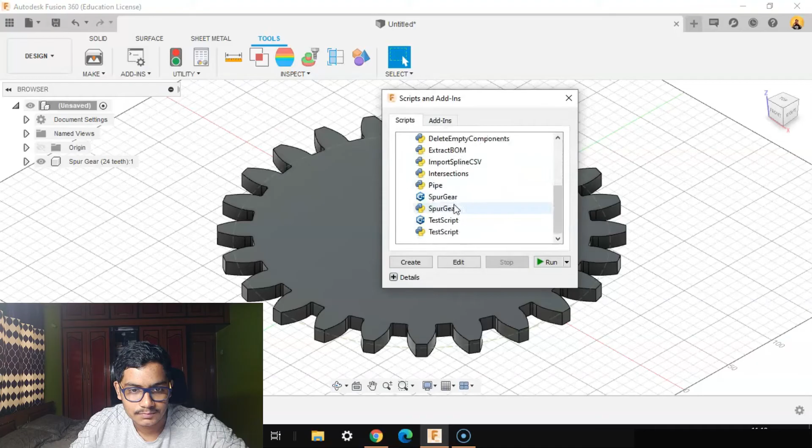We won't totally design the gear. We'll go to Tools, Add-ins, Scripts and Add-ins. Here you can see you'll get spur gear already. We'll double click on it and we'll say OK. We'll add one more, but let's increase the hole diameter for the second one.

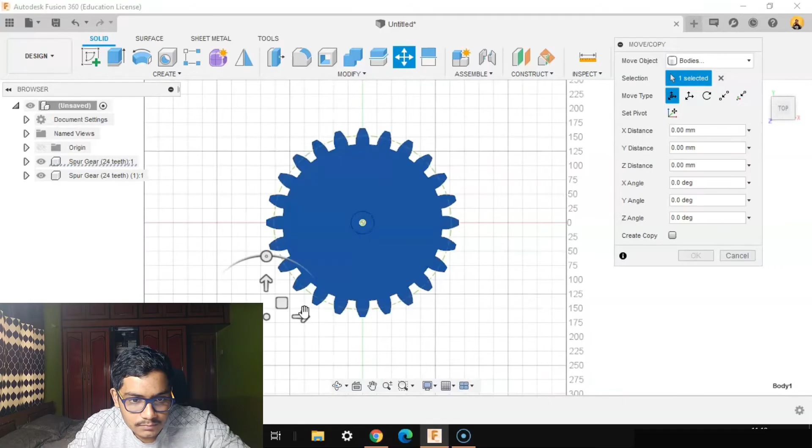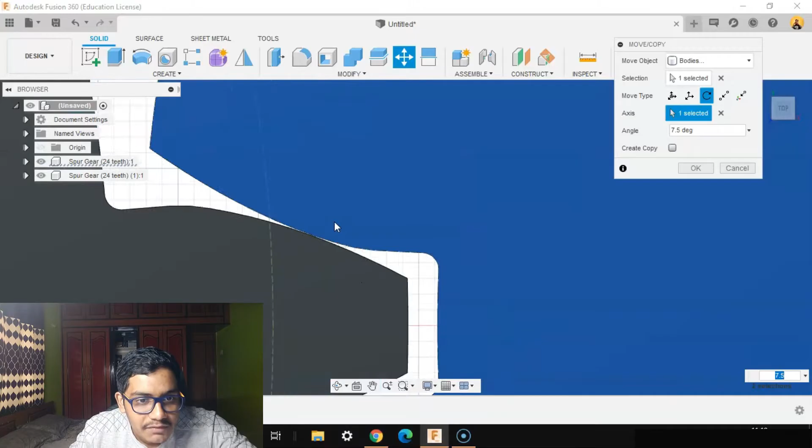Let's go to the top view. Let's move them. Let's rotate it with respect to this axis. Make sure that they are not touching each other. There should be at least a little gap between both of them. Nice. Say OK.

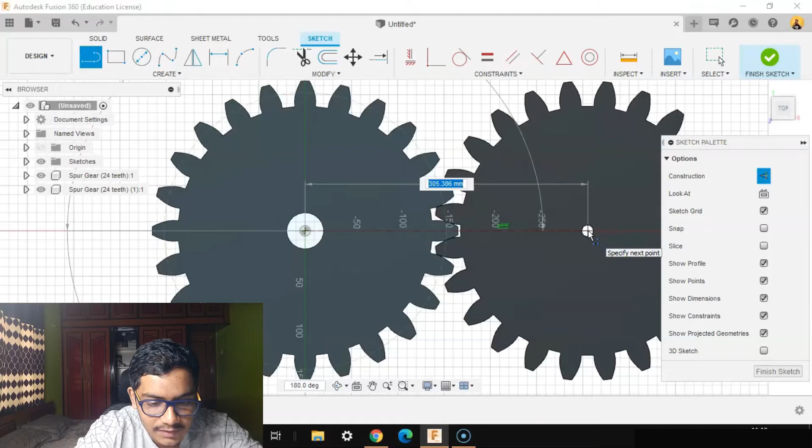Let's create a sketch on this gear. I'll make a construction line from this point to this center. This should be 305. Even the distance between the gears that time was 305. We'll say finish sketch.

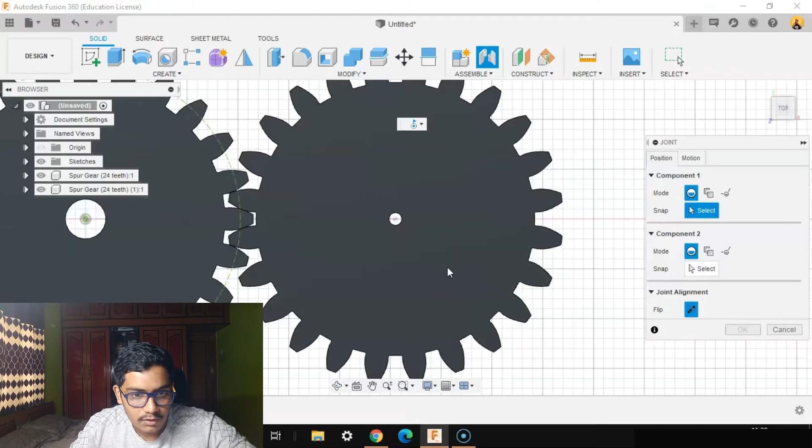Let's make the joints now. Motion will be revolute. Revolute joint. You have rigid, you have revolute, you have slider, cylindrical, pin slot, planar and ball. We'll go with revolute and position. For the first gear, make sure that this thing, second one, you can see the animation, it's revolving around that axis. I'll say OK. I'll go to joints.

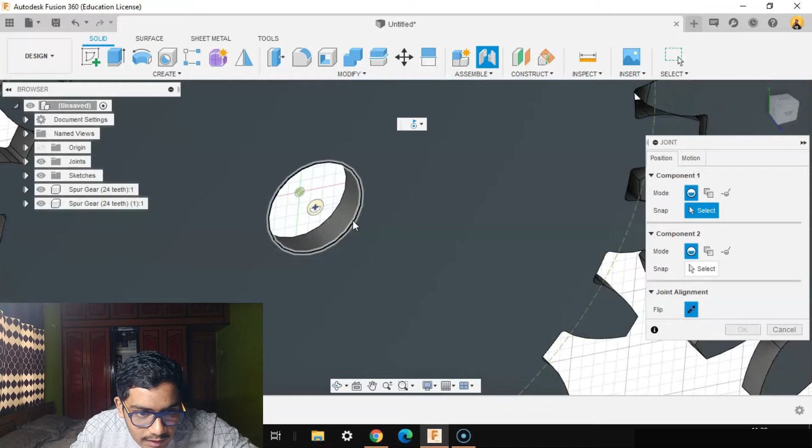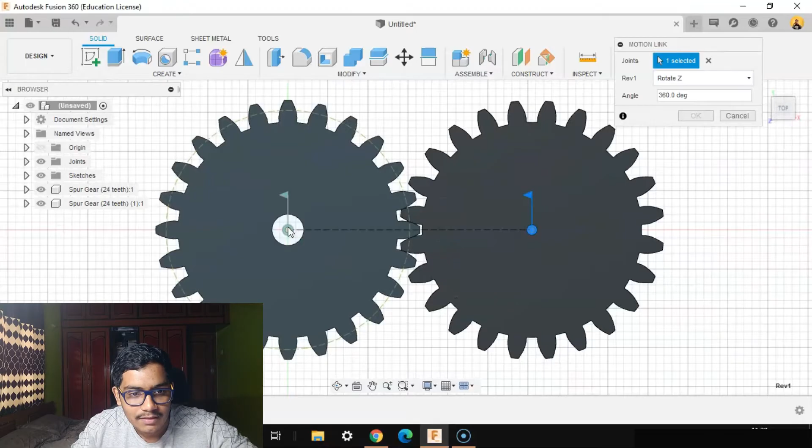Now for this one, select this one. It's revolving, I'll say OK. Go to the top view again. You can see that this is revolving, revert position. So now let's add the motion links. I'll add the motion link between these two joints, this joint as well as this joint, but the reverse, because gears will be reversed. I'll say OK. You can see that when I move this, it's perfect now. Again I'll revert back.

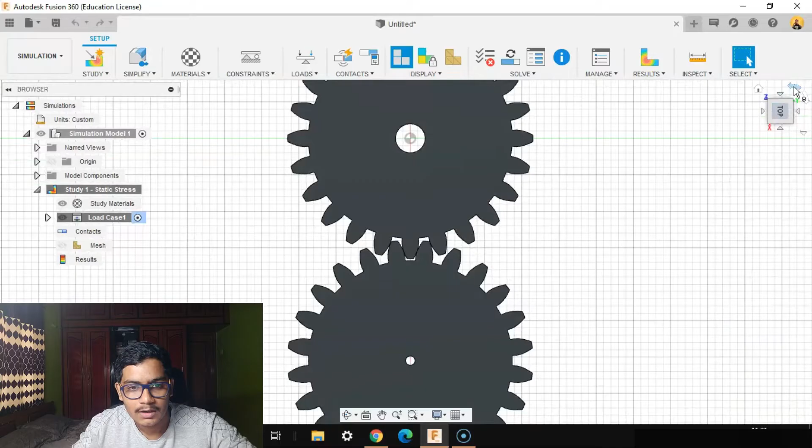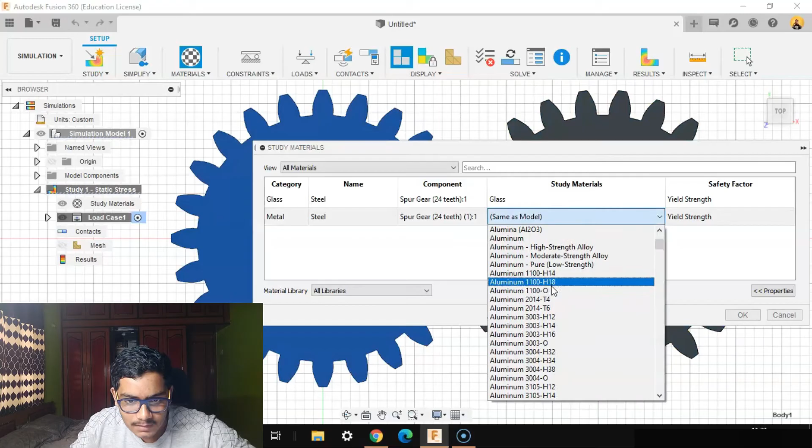So now let's simulate. Go to simulation. We'll be fully focusing on static stress simulation in this video. Go to my top view. Okay, let this be the driver, let this be the driven gear. So let's go to materials, study materials. This gear, let's make it as glass. We're just understanding simulation here, and this one as stainless steel. You can see that this is glass, this is stainless steel. Glass is not visible, so I'll inspect and toggle it on, so you can see in different colors. We've done with our materials.

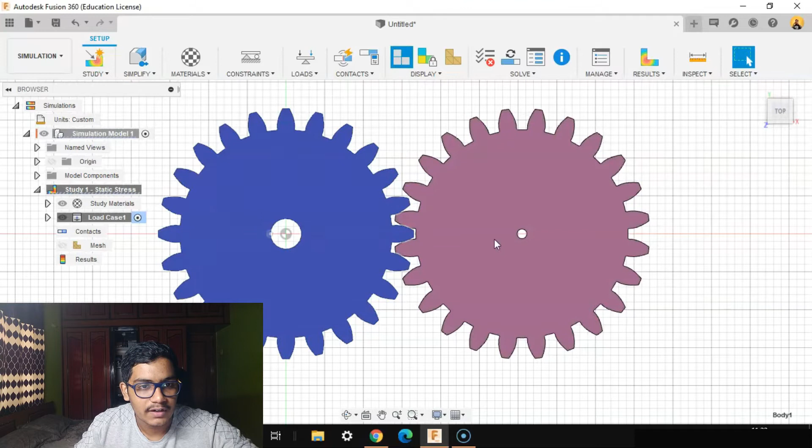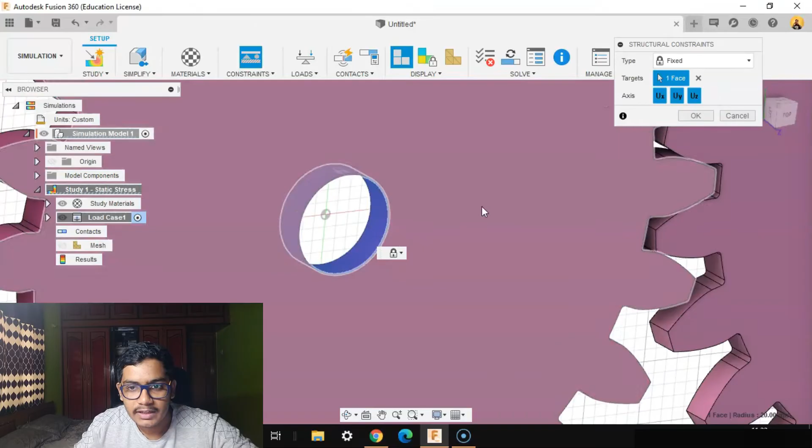We'll go with constraints. We'll fix this face of the gear. We'll say OK. We'll again constrain this face, but this will be a pin so that it can revolve. Axial and radial will be on, tangential will be off.

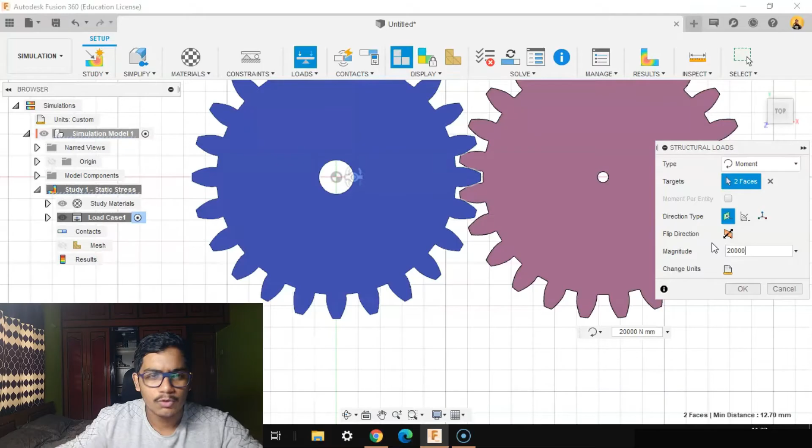OK. Now let's give the load. Type will be moment on this face as well as this face. Or you can even give it only one face, but I'm giving it to two here. I'll give around 20,000 Newton millimeters. That is the units here. Not too much of force. It will be 20 Newton meters.

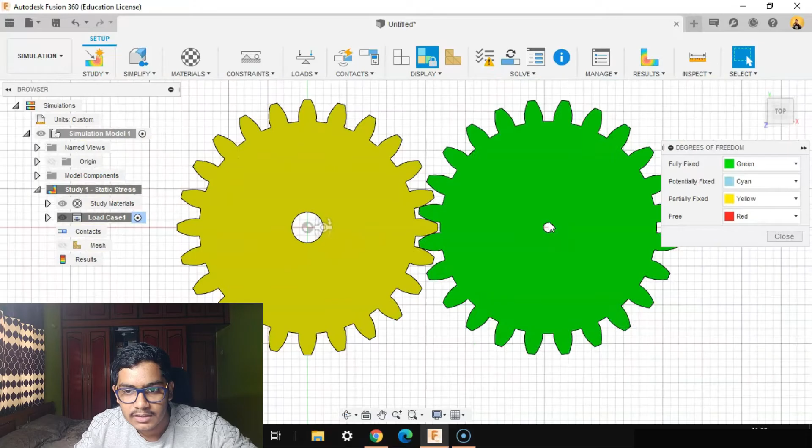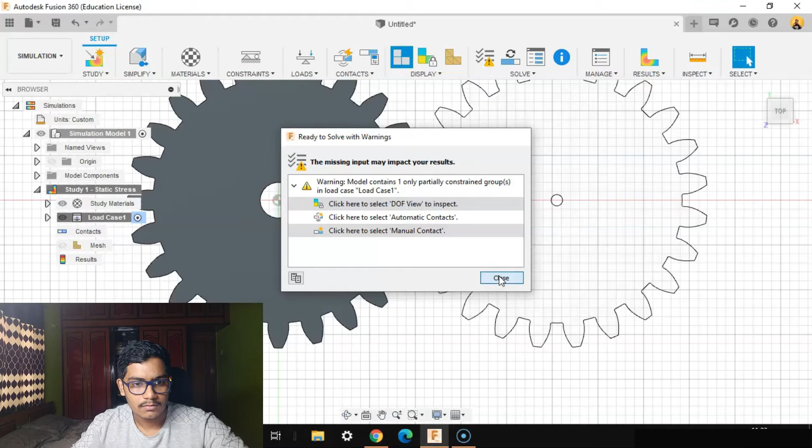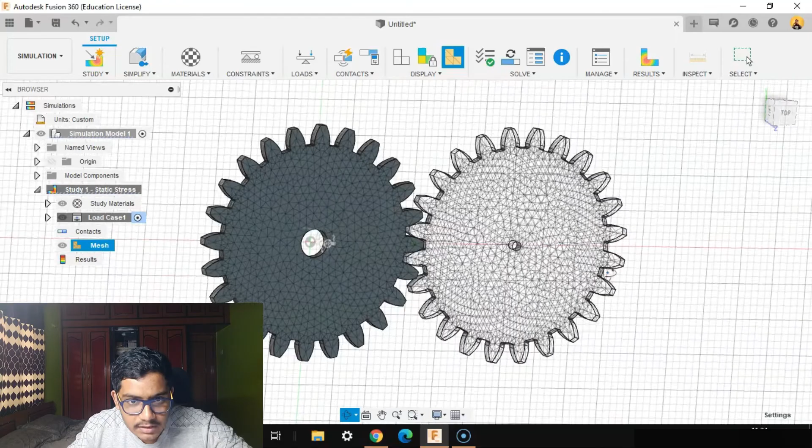You can see that our pre-check is telling it's not yet. We can't still solve it. Degree of freedom view. This is fully fixed, this is partially fixed. We need to fully fix it. So we'll do automatic contacts, generate. Automatic contacts is done. Compute the mesh. Okay, the mesh is done. So you can see our pre-check is already ticked, so that we can solve it now.

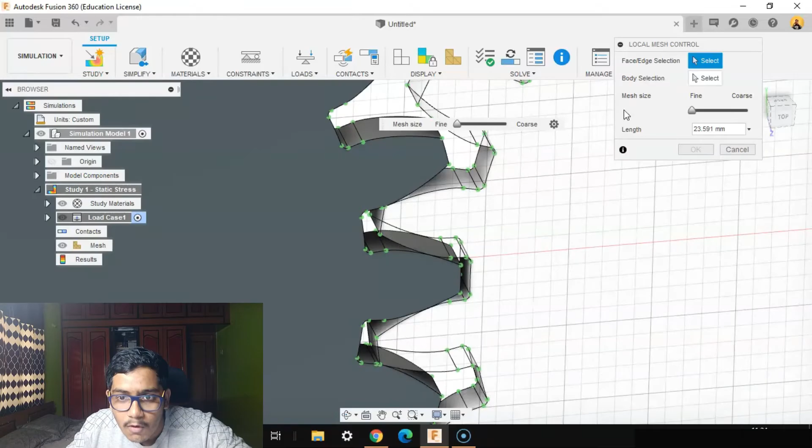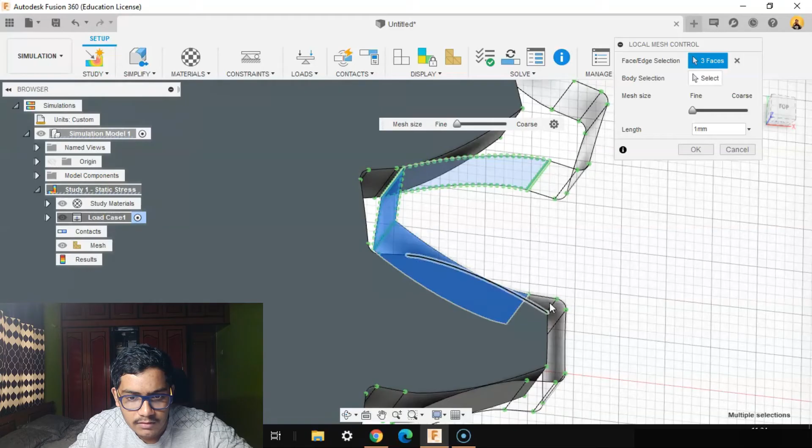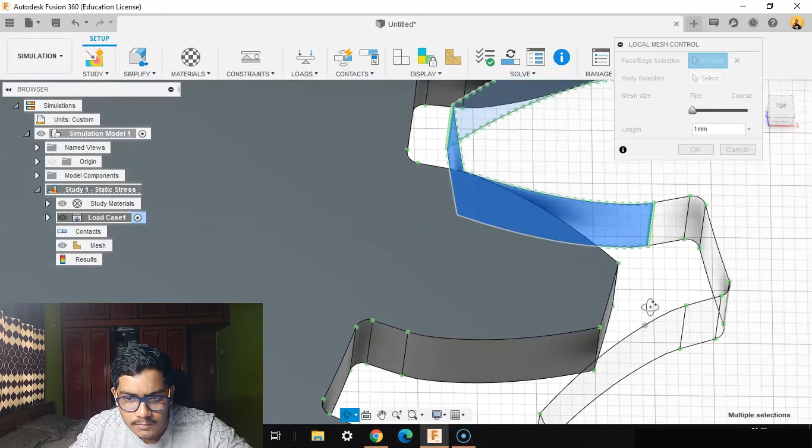So I'll go to manage, I'll go to local mesh control. You can see that this side is where the maximum tension force will be applied, over these faces here. So I'll select these faces and make them around 1 mm, so that after solving we can see exactly. This face, this face, this face, this face, this face, this face, this face. I'll say OK.

So now our pre-check is also done. The study setup has all the information required. Now we'll solve it. I'll solve it on the cloud. We didn't name the file. We'll save it first. We'll put it as Gear Study of Simulation. Save. And our solution is done. You can see the actual minimum safety factor is 3.4. I wanted a safety factor of 4.

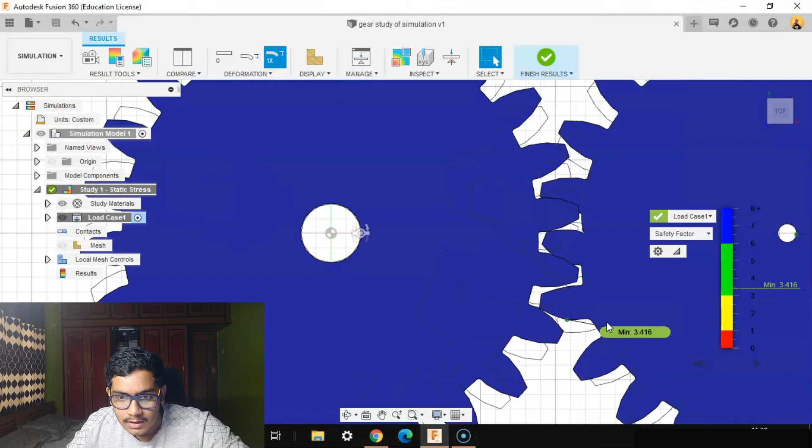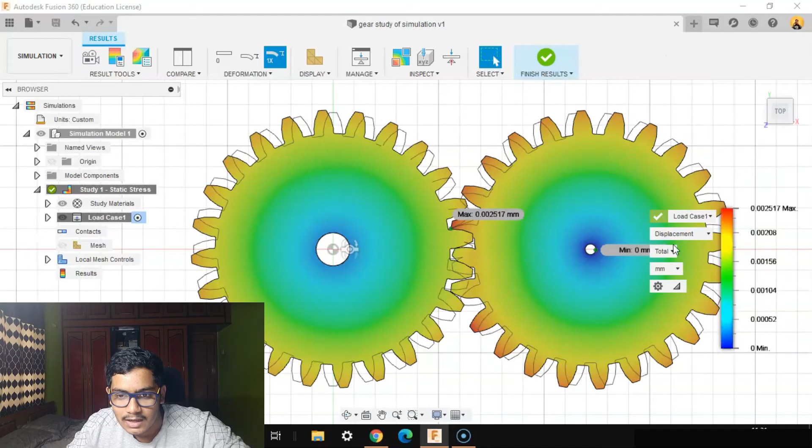Never mind. You can see here you have safety factor, you have stress, you have displacement, you have reaction force, strain, contact pressure. Let's animate and see. Go to safety factor, zoom in and see. You will get to know the areas where you will have the least factor of safety. So this is load case 1.

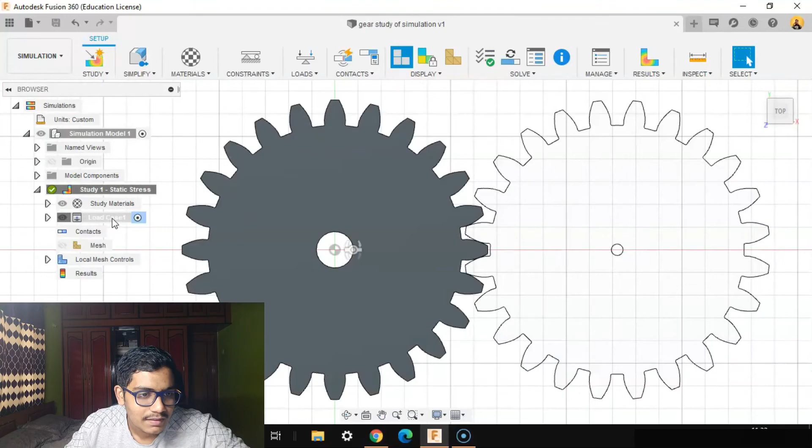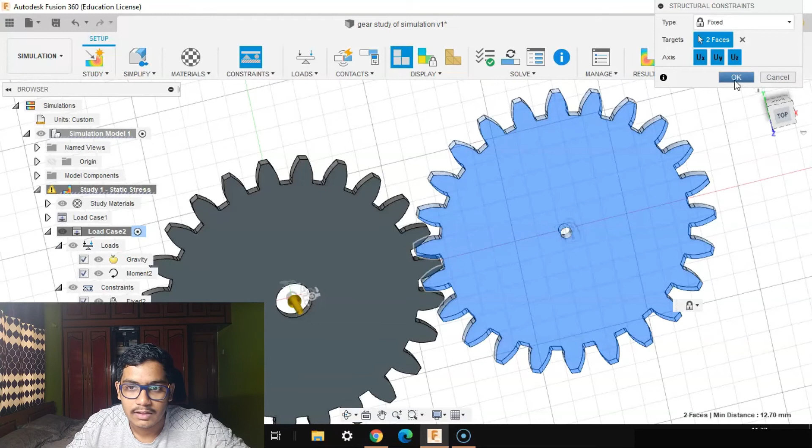We'll say finish results. We'll make another load case. We'll clone this load case. This will be load case 2. We'll go there. All the loads are there. We'll turn on gravity here. We'll see how that works out. Constraints, we'll add 2 more constraints. Let's constrain this face as well as this face. And I'll say okay. Now let's see how the solution will come out. I'll solve it on cloud. You can solve it locally or on cloud.

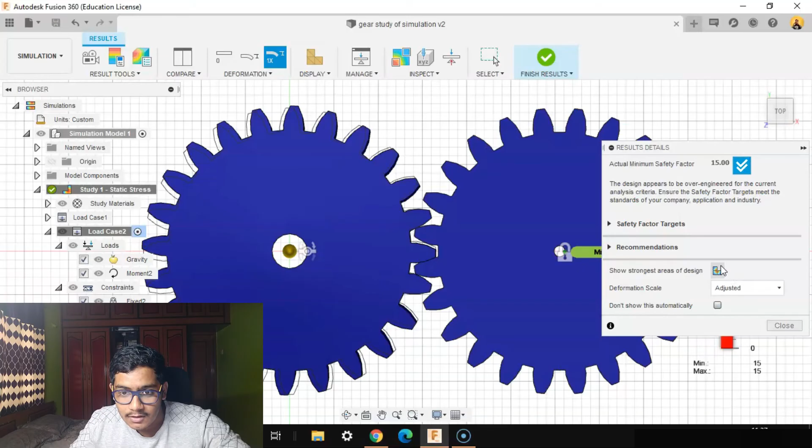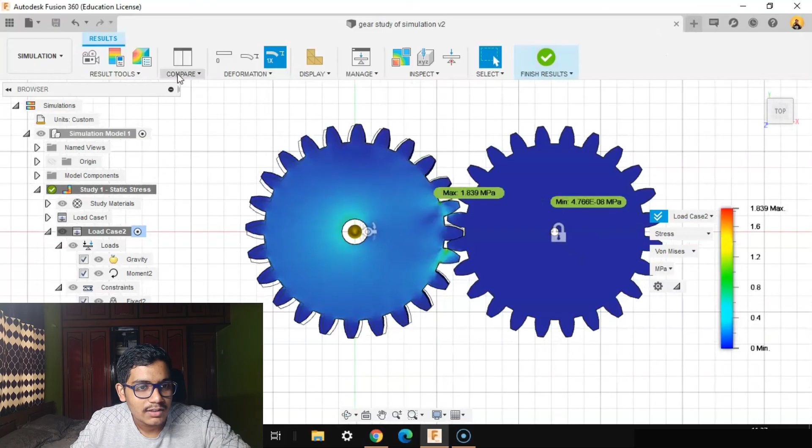So our solution is done. We have a factor of safety of 15. That is too much. Let's see the stress animation. We can even compare the 2 load cases. This is load case 1. Let's make this load case 2. Go to the top view.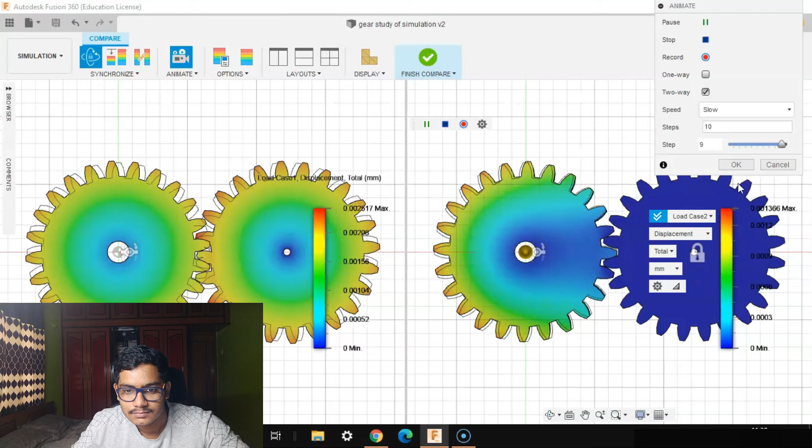Go to stress or displacement. Go to displacement. You can see here this is not at all displaced because it's fully constrained. Here we constrained only the inner face. Here we constrained the outer face as well. So only this is getting displaced. You can even put the mesh display here. You can see that we've made more meshes here.

Thank you so much for watching this video. Hopefully you guys have got a rough idea on static stress simulation.